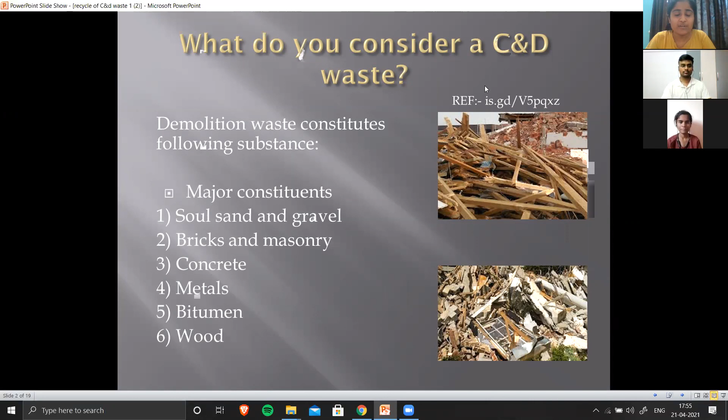Let me start by giving you some information about what consists in C&D waste. The major constituents include soil, sand and gravel, bricks and masonry, concrete, metals, bitumen and wood, and minor constituents like conduits, pipes, electrical fixtures, glass panels, tiles and glazed tiles.

As I said at the beginning, it seems dangerous when left unattended, but I ponder on the thought that every atom from waste cannot be treated now, but someday it can be. So is it really a waste? I say C&D waste is like Shaktiman disguised as Gangadhar. Sorry to speak metaphorically, but C&D waste is a resource in disguise.

Why? Let's see some more facts. Is construction and demolition really a waste? Construction contributes 5% of GDP, contains 78% of gross capital formation, and generates assets worth 200 billion. While this asset is being demolished, we consider that it gives an asset yet again while being destroyed. So construction and demolition waste is a resource in disguise.

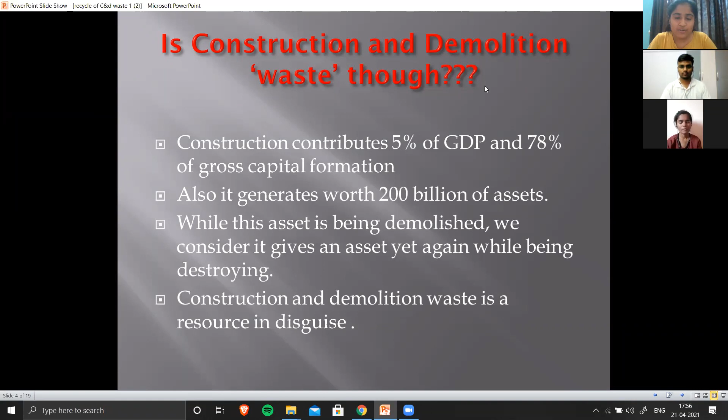Before going further, let me tell you what to consider while thinking about going for reuse and recycle. Next slide, please.

First we can consider economy—is it really economical to reuse and recycle construction and demolition waste? Another factor is its compatibility with other materials and its material properties.

Let's now focus on reuse first before going for the complicated churning process. Like, do you know Jugaad? This technique was invented when people started making new things out of what the world considered useless. They pick up something and say, 'Abhi kar deta hu,' and you've got a breakthrough product. We can call it a so-called entrepreneurship venture by dealing in C&D waste.

Recycling uses a lot of capital to make another byproduct while treating the waste, so I think reuse is the best way to recycle, and reuse is also the first step of recycling. But the million dollar question still remains: how can we convert it into a business?

Well, we are just planting the idea here. Watering it is completely up to you—it's an adventure that you guys need to unravel.

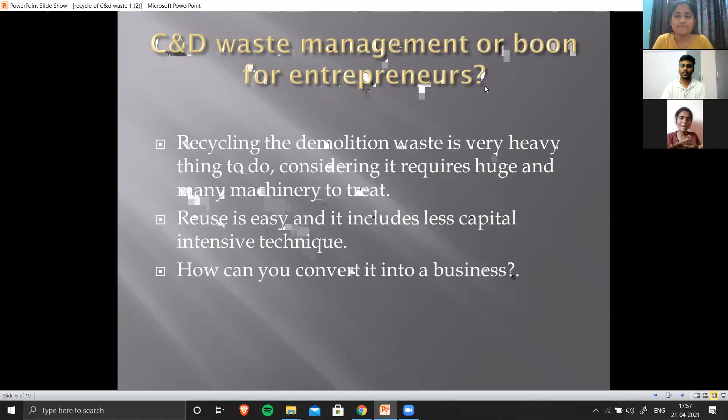Let's focus on another thing. While depression engulfs the nation, and with budding content-creating artists around us, this waste particularly can be used in rather innovative ways, which can be helpful environmentally speaking as well.

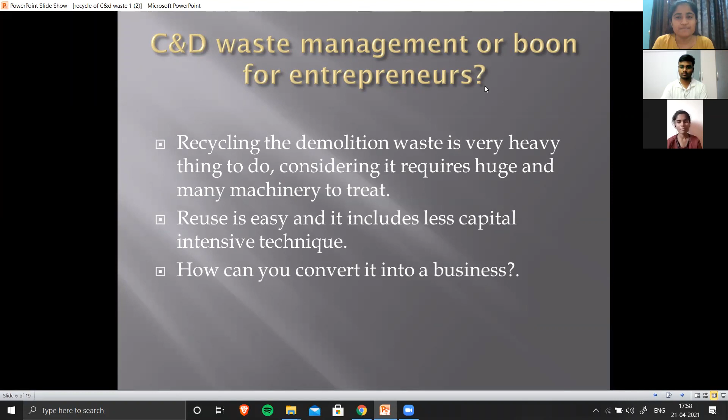In upcoming slides, we will be discussing resources, namely concrete aggregates, bricks, conduits and pipes—both PVC and metal pipes—as well as tiles, marbles, and panels.

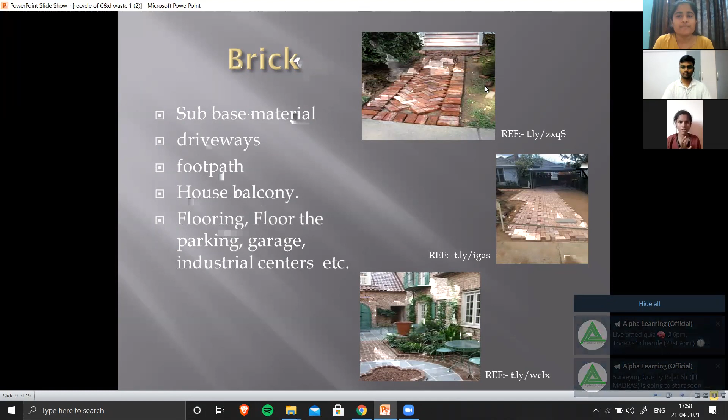Let's move forward. We are going to tell you some ways to reuse this material, using it in its most crude form as possible.

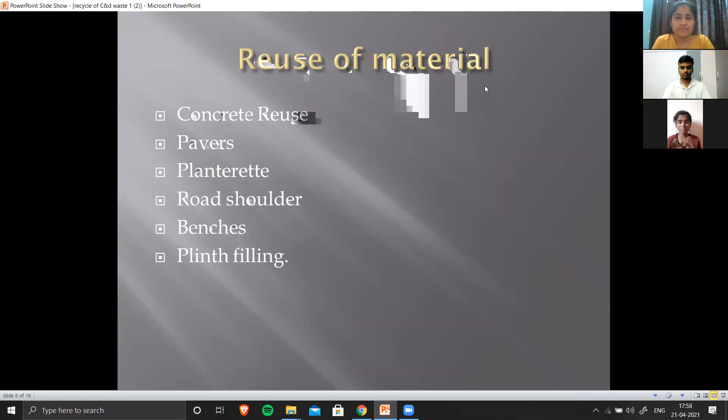First is concrete aggregate. We can use concrete for pavers—of course they won't be strong enough, but still they can do well. Then we can make planterettes out of it; planterettes are nothing but flower pots. We can also use them as filling material for road shoulders, for making benches in parks, and for plinth filling.

Next, bricks. Broken bricks can be used as a sub-base material. They can also be crushed and used in making concrete, but the seventh day strength and the 28th day strength are not good. So it's not mandatory that you should not use it, but some people can.

Bricks can particularly be used for making driveways. Broken bricks and first class bricks are good in shape. Always remember that whenever a structure is demolished, it's not because of the weakness of bricks, it's generally because of structural problems. So bricks are always good in any case.

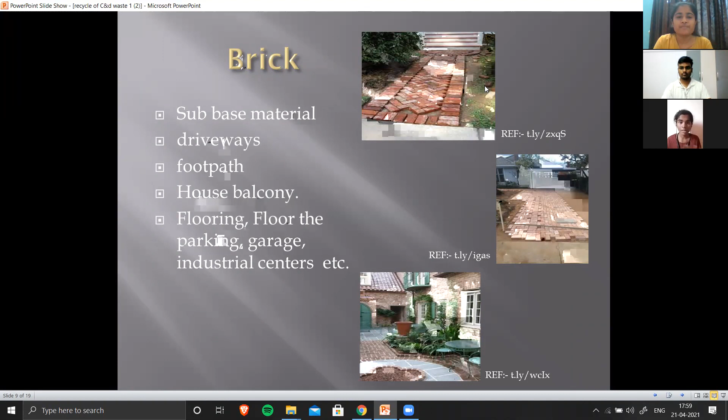They can be used for making driveways, floorings of parkings or garages, or industrial centers. I particularly feel we can use them to make house balconies as well, because a house balcony made this way would give you a down to earth kind of feeling.

Another one is tiles. Tiles are my personal favorite because I like murals, and you can make murals out of tiles. For those who don't know, murals are huge paintings made on walls. They give environmental impacting images, showing whatever is happening around you, trying to provoke or invoke a sense of responsibility in you, so that you do better to make yourself better. That is the actual work of a mural.

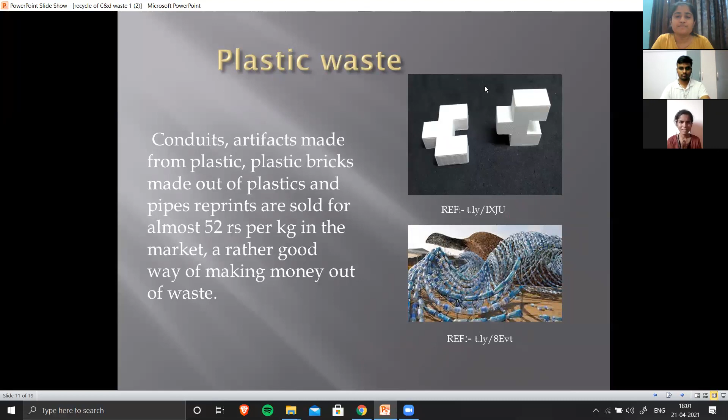Another one is plastic waste. Everyone knows about plastic and how it can be recycled, but we're not talking about plastic bags here. We're talking about PVC pipes, which are hard, good quality plastic - like conduit pipes which carry electrical wiring inside. These pipes can be reground, and then these regrinds can be used to make anything because it's literally remoldable. You won't believe it, but on India Mart, it's sold for 52 rupees per kg. So it's a good entrepreneurial idea - we can make money out of it.

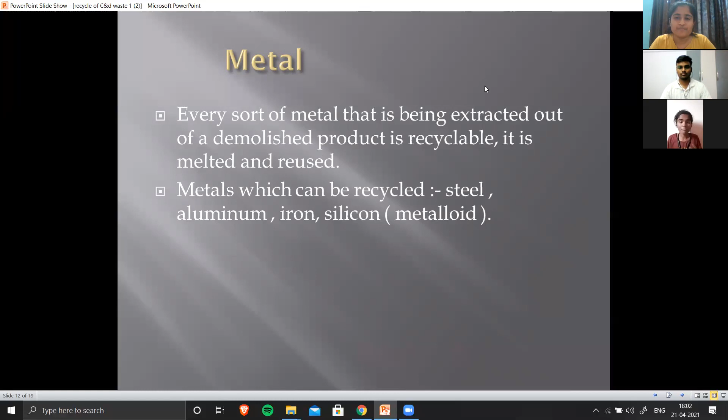Another one is panels, like door panels - there will be doors and windows. The doors are of course made of wood, but window panels can be made of aluminium and glass. Glass is completely recyclable, aluminium metal is recyclable too. But if they're made of wood, they can literally be reused in another building - the same piece can be used elsewhere, or you can cut it to make an artifact and sell it. You can even grow mushrooms over it. It's a business.

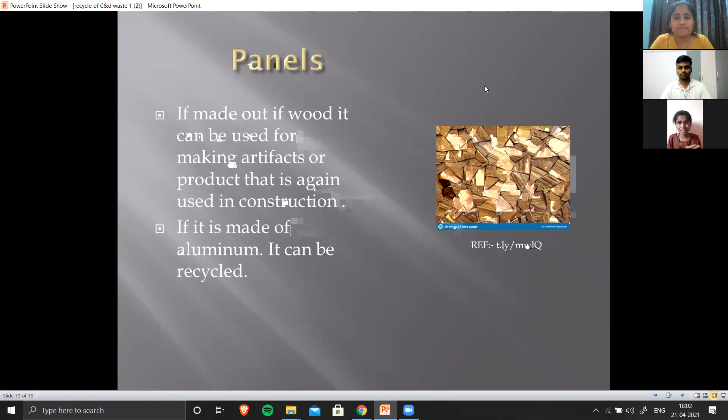Another one, asphalt, is my second favorite because it can be extracted from roads. You demolish a bitumen road, melt it, pick up the pieces and melt them, and make asphalt millings out of it. Why is asphalt milling better than any other material? Because it's cost effective, sustainable, there's no maintenance needed - it's not a liability, it's an asset, and it's adaptable to every kind of weather.

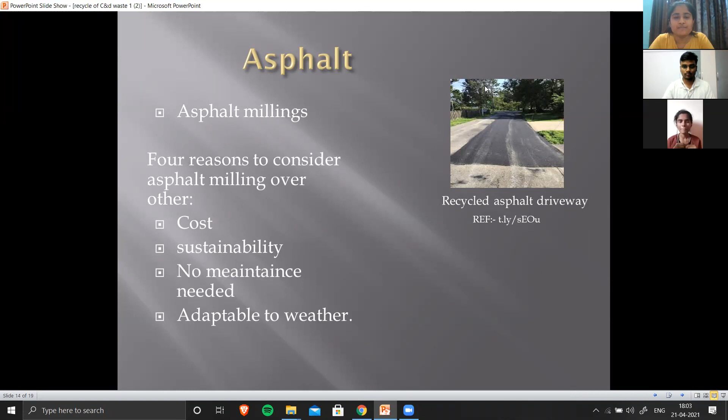Thank you very much. As previous speakers Anusha and Rashi said, C&D waste is not a waste. Actually it is a resource or treasure for entrepreneurs or businessmen. If we do proper recycling or proper management of this waste, it will truly turn into a treasure. So why is this not happening in India?

What are we doing now? We are living in a concrete jungle, and now and then every building is being demolished or new buildings are being constructed. So C&D waste is stored outside or alongside the road, and this definitely causes traffic congestion.

And if it is directly dumped in MSW, it will make the municipal solid waste heavy and bring down its quality, which may otherwise be used for composting and energy recovery. If we dump our C&D waste in it, it degrades its quality.

If left behind, it will generate particulate matter PM10, causing lung problems to people in the vicinity or working there. This waste may also end up dumped in drains, leading to clogging and flooding. Remember the Chennai flood - it was caused due to the same reason.

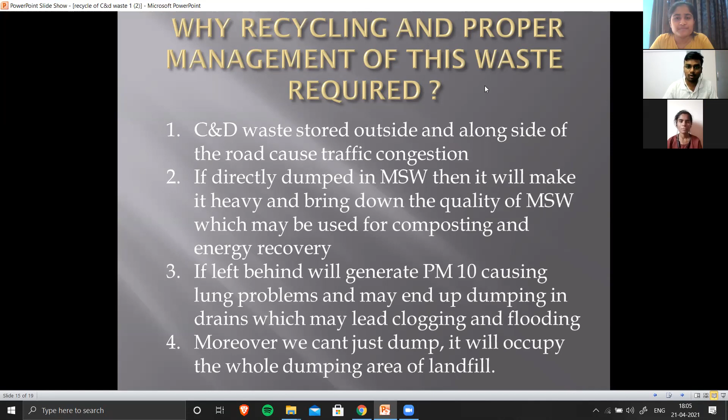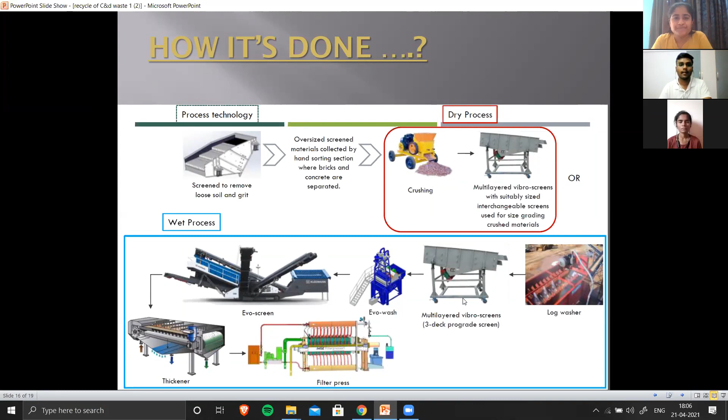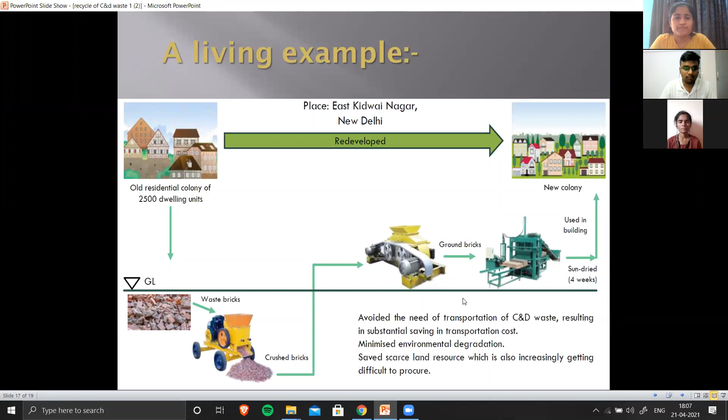So we have talked theoretically a lot - let's see a live example. This is a place called East Kidwai Nagar in New Delhi. It was an old residential colony of 2,500 dwellings, and since it was old, the building life was over, so it was necessary to construct a new colony there.

As we talked about bricks, waste bricks were crushed in machines. The crushed bricks were converted into ground bricks, and after 4 weeks of sun drying, were used again in the construction of the new colony. So no virgin material was used here, and a lot of resources were secured.

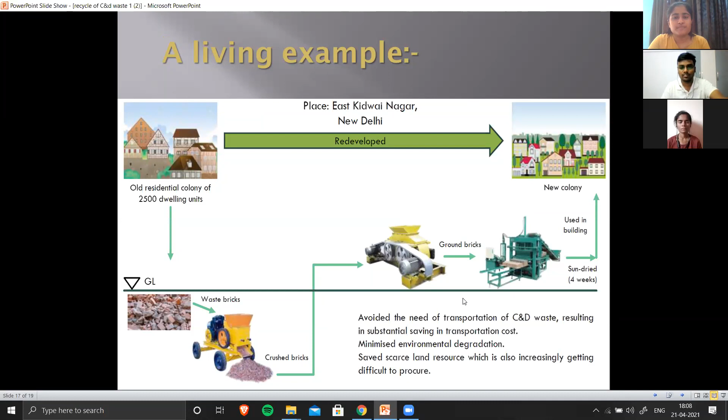The transportation cost was also cut down because the processing unit itself was established on the old residential colony site. This minimized environmental degradation and saved scarce land resources, which are increasingly difficult to procure - as I said earlier, the C&D waste is large in volume and will occupy the whole landfill.